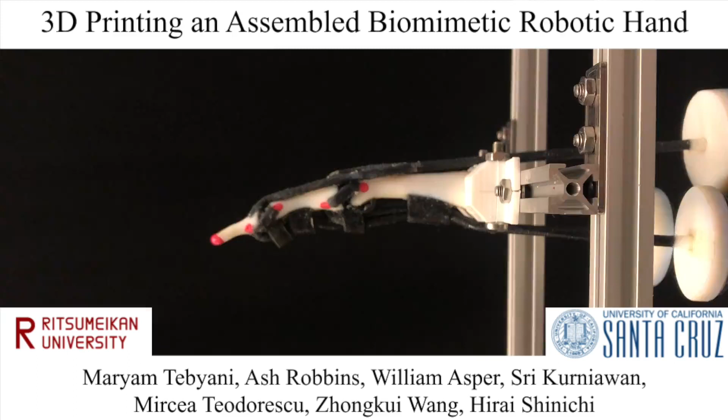We present a novel approach for fabricating tendon-driven robotic systems. Particularly, we demonstrate that a biomimetic finger featuring accurate bone geometry, ligament structures, and viscoelastic tendons can be synthesized as a single part using a multi-material printer, as shown here.

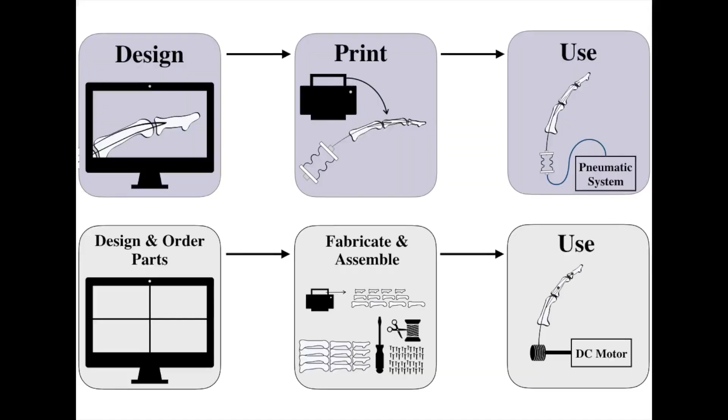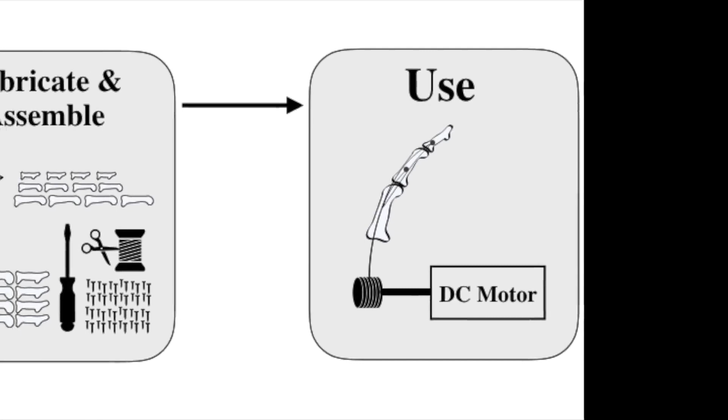The typical process for creating a robotic platform often consists of designing and ordering custom parts and time-consuming assembly. The proposed design process for a single print robotic platform relies on a multi-material printer, which eliminates the need to construct an interface between the rigid skeletal structure and tendon system.

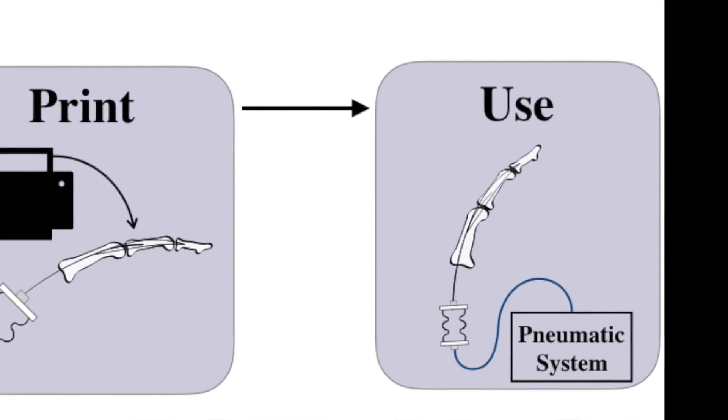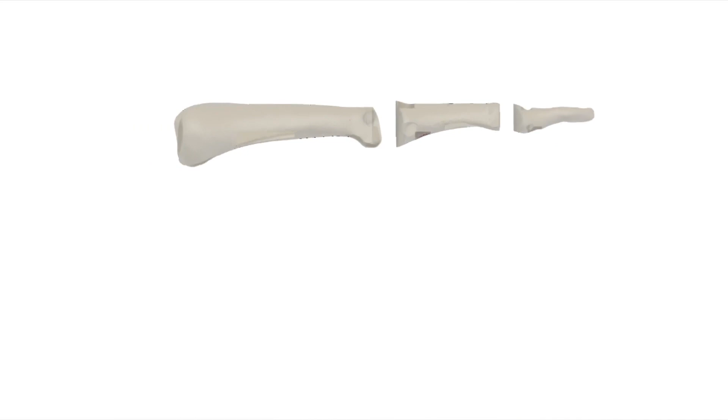The CAD model of the finger design features bio-inspired anatomical features vital to replicating motions of the human finger. The model contains printable designs for the distal, middle, and proximal phalanges, articular cartilage, collateral ligaments, volar plates, annular pulleys, flexor tendons, and common extensor mechanism.

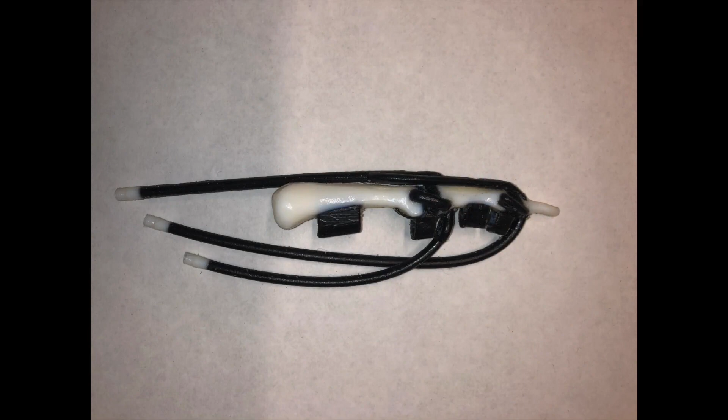This design is printed as a single part where the bones are rigid and the ligaments and tendons are flexible. The artificial muscle required to drive the printed tendons of the finger can also be printed in place.

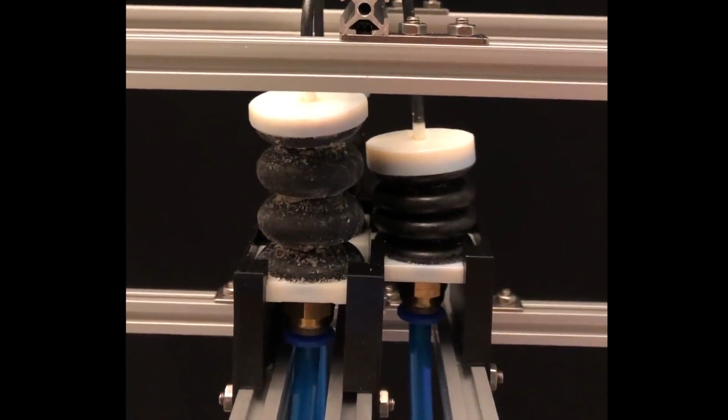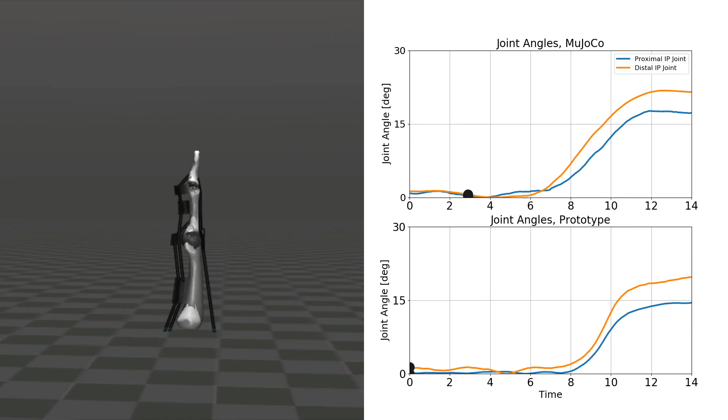The resulting robotic platform is difficult to model analytically, so the proposed CAD design was imported to MuJoCo, a physics simulation environment which can be used to construct controllers and to optimize the interactions between the musculoskeletal structure, tendons, and actuation. The simulation results were validated using an in-house developed test rig.

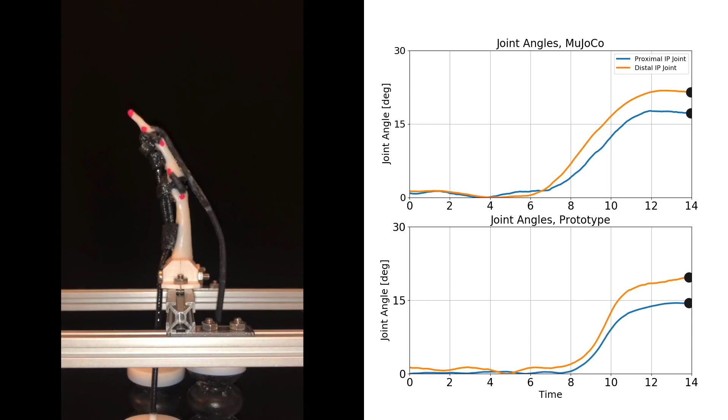It was found that three actuation elements are sufficient to control the finger's kinematics and dynamics, and MuJoCo simulations are similar to the experimental measurements.